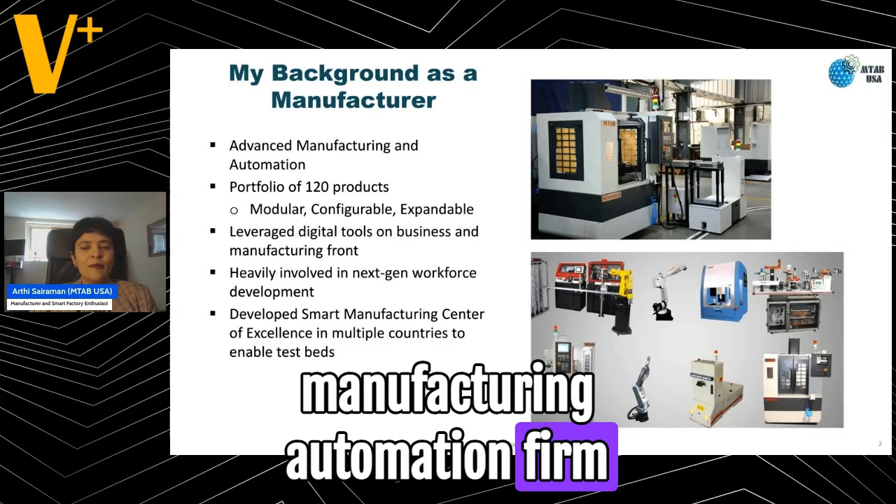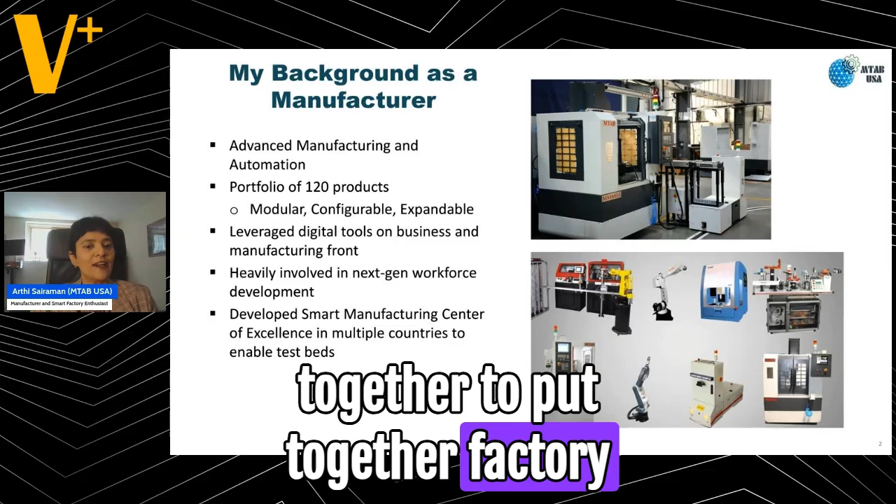In my next slide, I want to share with you what my background is. I identify myself as a manufacturer first, and over the last 15 plus years, I led an advanced manufacturing and automation firm with a strong portfolio of about 120 products, which included CNC, robots, AGVs, and modular automation systems that we could build together to put together factory automation, connect them digitally, and serve our customers with the right results. Now, one of the things that I learned as a manufacturer was to make sure our products were always modular, configurable, and expandable.

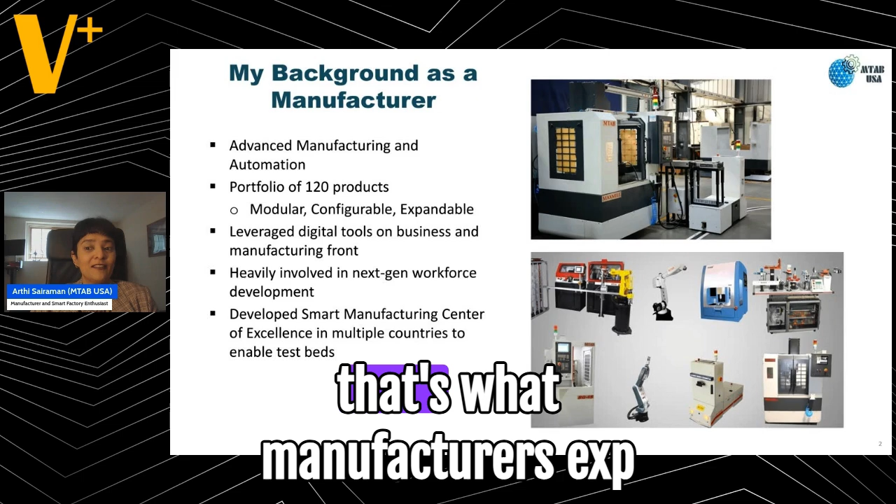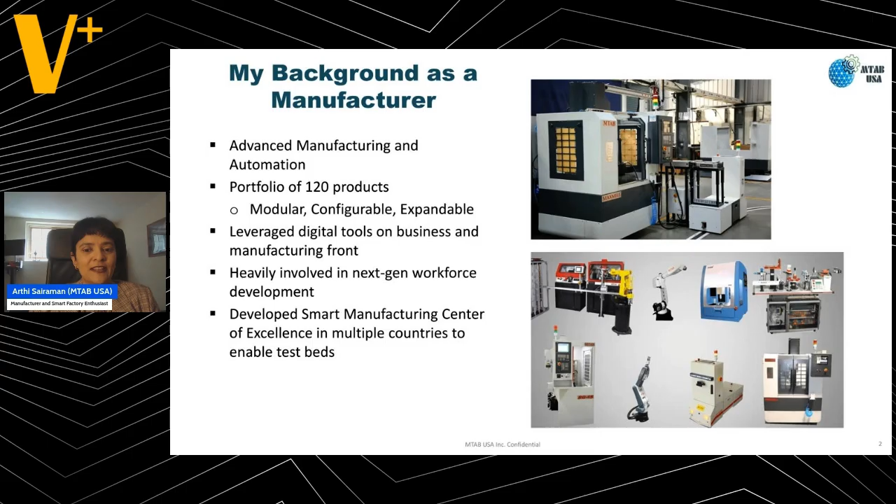The reason is that's what manufacturers are expecting as they are investing in this kind of capital equipment. Quite early in my work at this company, we started leveraging Industry 4.0 and smart manufacturing technologies, and we put them to use in our business as well as manufacturing processes and activities. That resulted in us standing up an Industry 4.0 vertical within our organization.

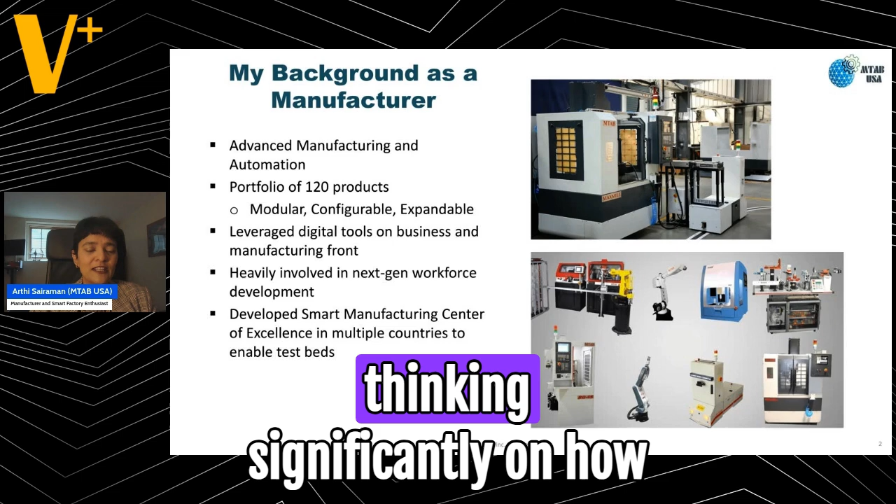And as we started doing that, we started thinking significantly about how this is going to affect the next generation workforce development. We were expecting the people we were hiring, and the people who were already working, to learn new technologies, which resulted in us building a strong relationship with respect to smart manufacturing and smart factory with academia around the world.

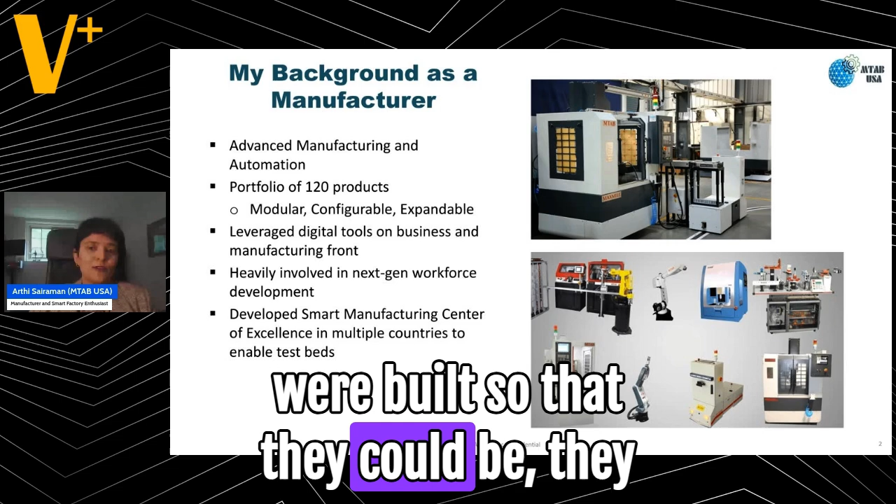We built multiple centers of excellence, about 400 plus across the world. These centers of excellence were built so that they could act as test beds for manufacturers themselves.

Still pleased to know that many of them come back to us and tell us what got them started in this manufacturing and automation career.

The key reason is that manufacturing career and awareness is still very low, and people choose not to come into manufacturing careers because they have some old-fashioned ideas about what this is.

The second thing which is happening is that we have set a high bar for quality. We are able to get good quality products from our manufacturers, and that means there's a lot of pressure to make sure that even when you're coming up with new products, whether it's automation or even simple gadgets that we use, expectation is very high.

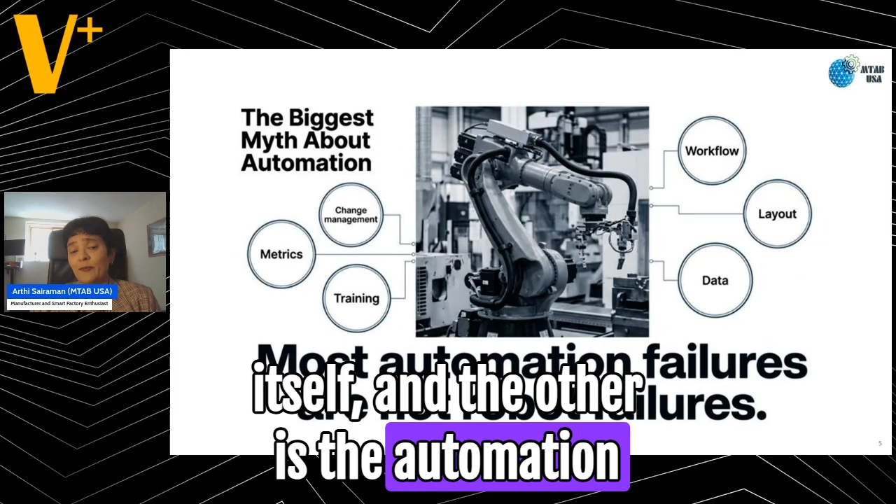Next slide, please. So what's the biggest issue that I have seen in terms of automation? When things do not work, the people who take the blame, one is, of course, the robot itself, the tool itself, and the other is the automation vendor not meeting their expectation. But that is about how the robot needs to be effectively used in the organization. This is also directly related to how the organization thinks about automation itself.

A manufacturer, a machine shop, was facing a significant delay in orders, and the owner of the machine shop had a standard conversation with the supervisor, and the supervisor provided some data, which is reactive data collected from the shop floor, asking why their orders were so backlogged and delayed. The supervisor did have good information, but it was reactive information.

And he said that they were fully loaded on their machines. They were running 2 shifts, and they think that it is a capacity issue. Maybe we should consider adding new equipment or another shift in order to meet their backlog orders. Now, the customer came to us saying, what can we do?

Do we look at adding another machine into their line to meet the capacity issue? Our approach was a little different. We dug a little bit more and asked, do you know what is the actual utilization on your machine? While you collect the information you need to raise money for a new machine, let's measure what's happening on the lines, the machines themselves. We found the machines were running at less than 50% utilization. With that data, they were able to make decisions around process improvement and gain another 20 to 30% of their capacity.

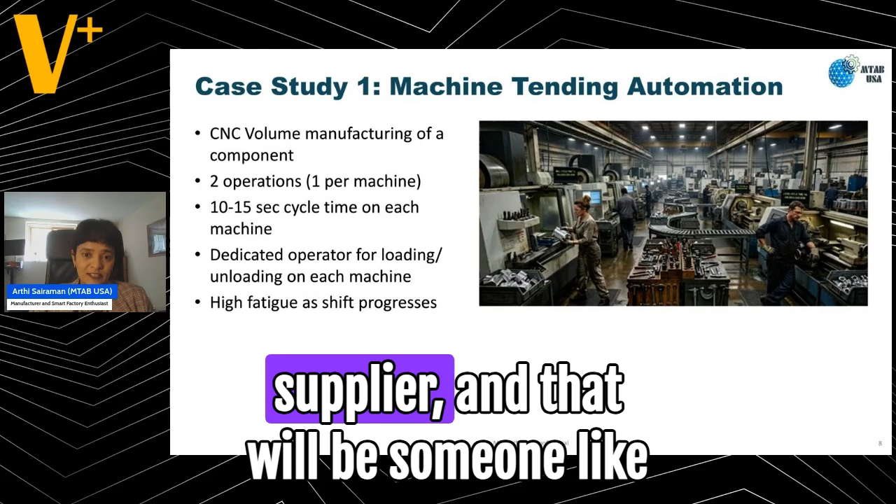Next slide, please. So we will start with two case studies. This is what I had in mind when preparing for this webinar. One is from the perspective of a traditional manufacturer and traditional automation supplier, someone like myself who has done this kind of work for several years. And another from the perspective of a manufacturing startup and how they are leveraging technology to give manufacturers modernization as well as increased capability.

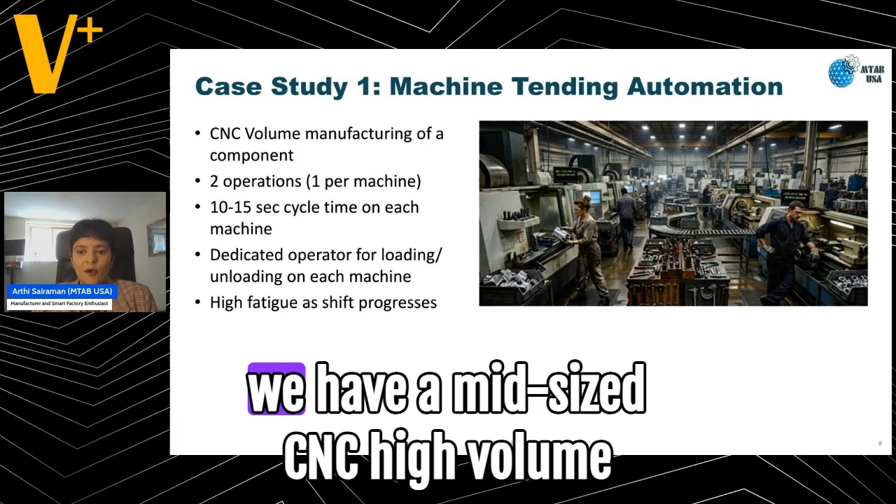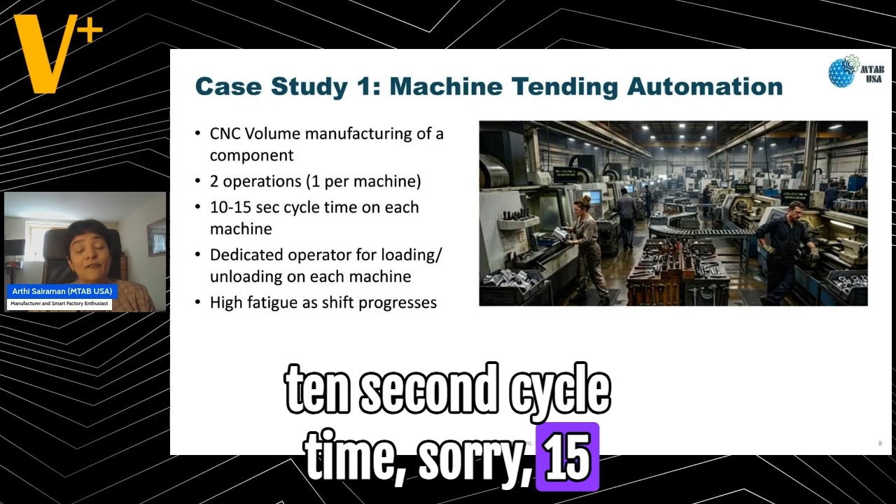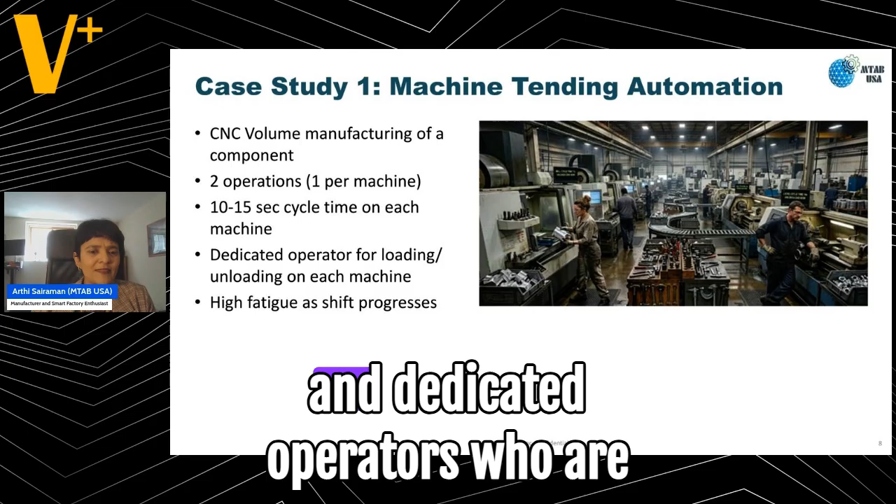So in the first example, we have a mid-sized CNC high-volume manufacturer of automotive components. To protect the privacy of our customer, these images are generated, but fairly true to what we're talking about. The automotive component they're looking to manufacture typically has two operations. The first operation is on a CNC mill with about a 15-second cycle time, and the second is on the lathe with about a 10 to 12-second cycle time. The way they've laid out the floor, we're talking about these long assembly floors, machine after machine after machine, and dedicated operators loading and unloading the machines.

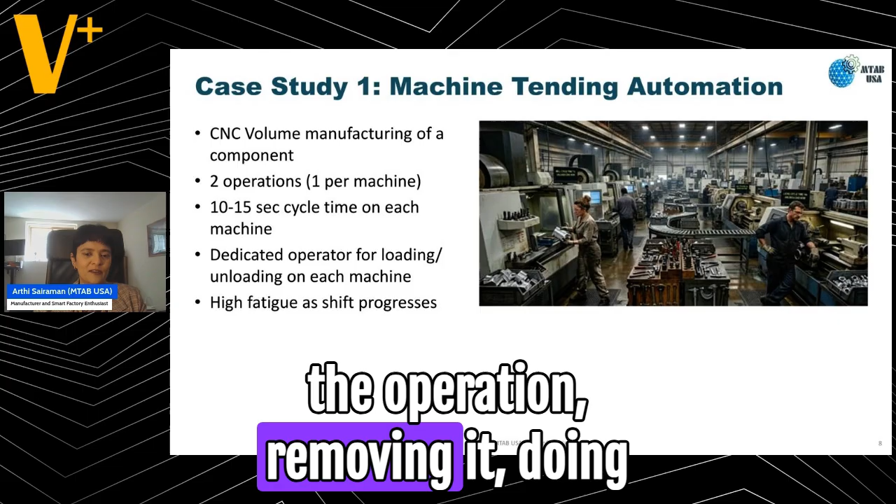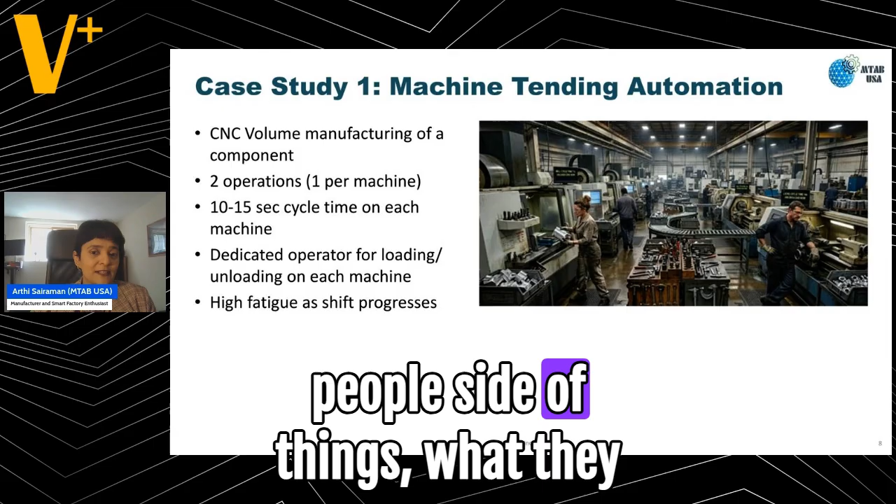With operations that are only a few seconds, you can imagine how quickly they are doing this activity of loading the workpiece, doing the operation, removing it, doing the next one, transferring it to the next station, etc. This can get pretty boring, and it's also high fatigue because of the repetitive operations. This particular unit was running it for two shifts, so they were seeing high variability in productivity. More importantly, on the people side of things, they were seeing high absenteeism as well as turnovers.

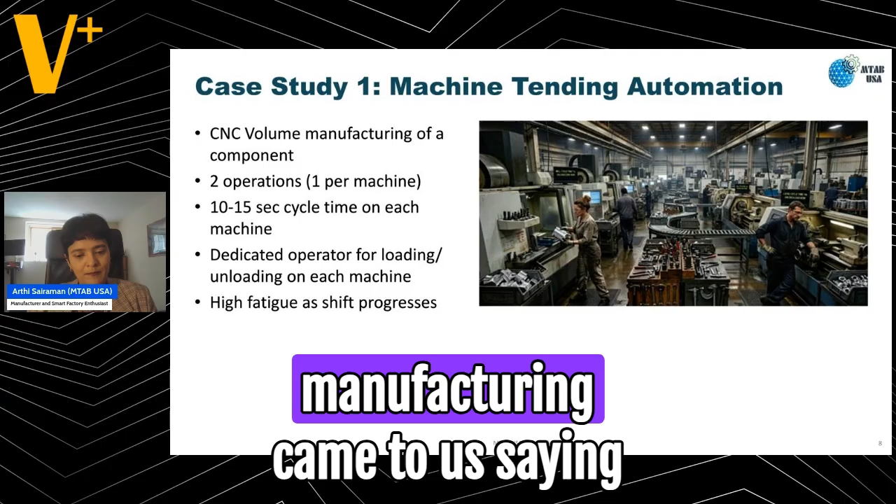When we talk to the supervisors, this is where the 'what else' question happens. The plant manager, the head of manufacturing, came to us saying, hey, we're having this problem where we're seeing high variability in our production. Can you help us solve this with automation? Absolutely interesting project. We are CNC machine tool builders as well as robot builders, so why not? Let's look at it.

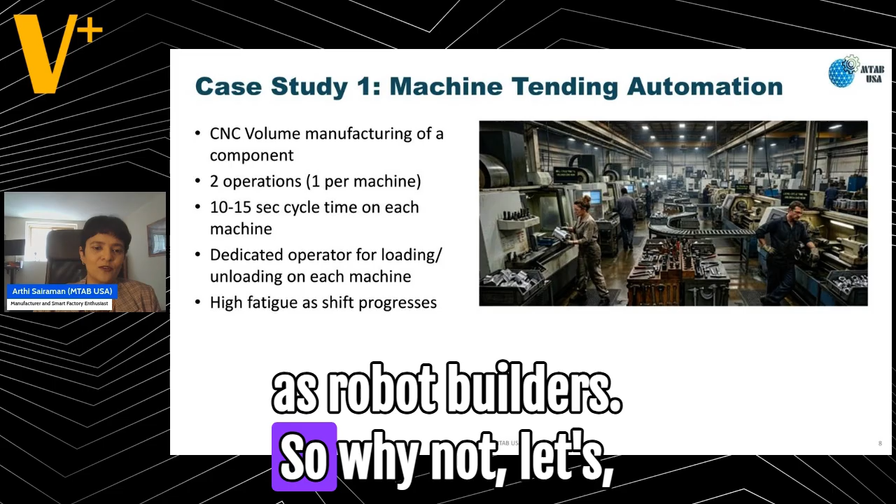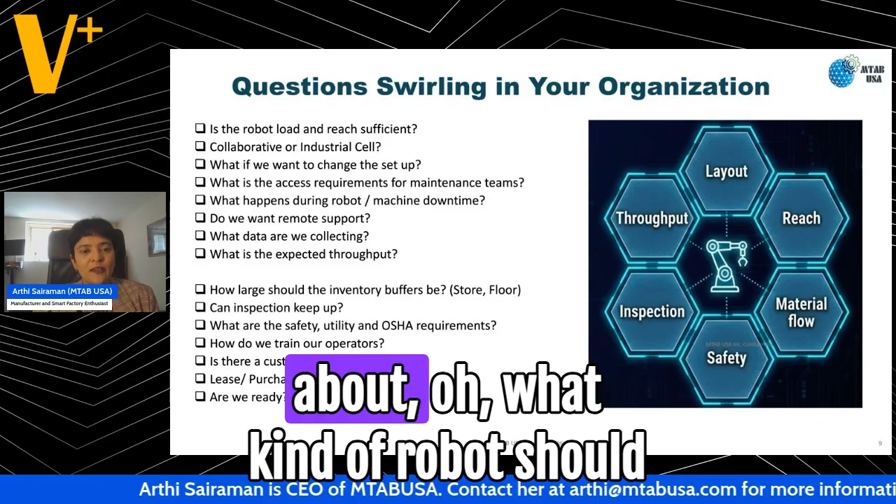So the project is pretty simple, right? They're saying we want to automate. We want you to think about how do you automate. If you go into an organization like this, they already have multiple questions swirling within it. There are the manufacturing and plant engineers thinking, what kind of robot should we buy? What should be the payload, the reach that we need? Should they be thinking about collaborative robots as well? Then, we need the flexibility to change the setup because we might want to change parts that we run through the machine. So how do we go about it? These are the technical questions happening.

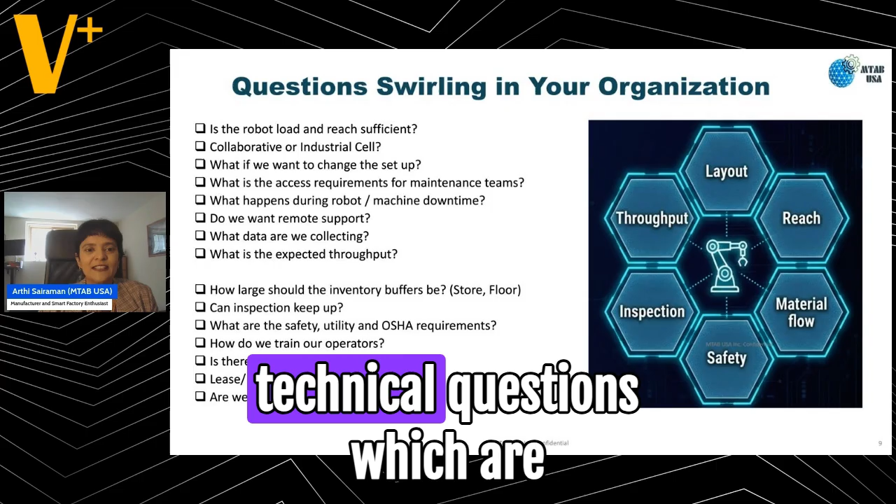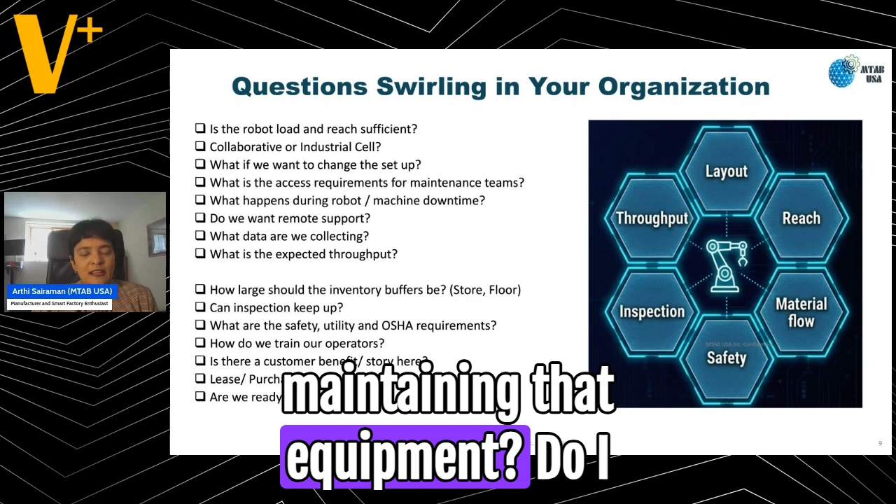And then we have the maintenance and repair team, the engineering team managing the machines, saying, oh, we're going to get some new equipment. How do I think about maintaining it? Do I need new skill sets? What are my requirements? I hear about remote management of these machines—should we think about getting that? Will that help us give better uptime to our internal customers, the plant operators and shop floor folks? Then they're talking about why we're doing this.

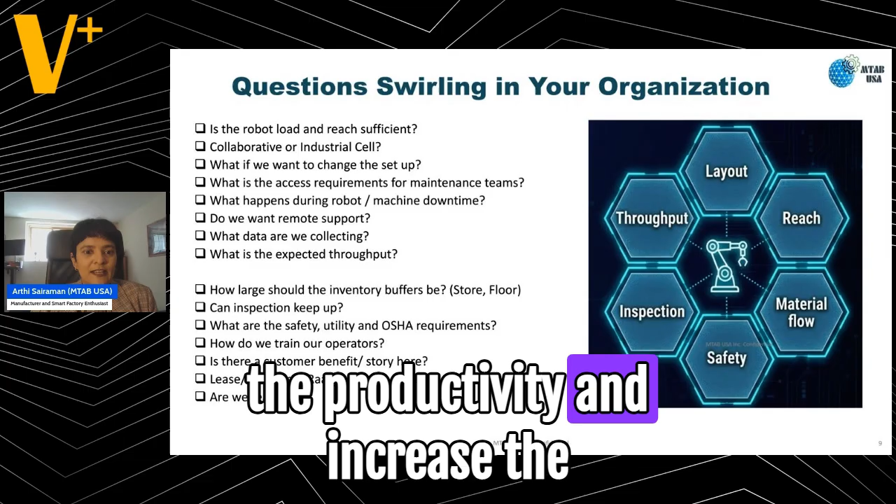How do we stabilize the productivity and increase the throughput within the organization? There are questions around what kind of material buffers do we need. Can my quality inspection keep up with it? Then we have the HR team, which is saying, we're introducing something new—do we have safety requirements that we need to meet, OSHA reporting requirements?

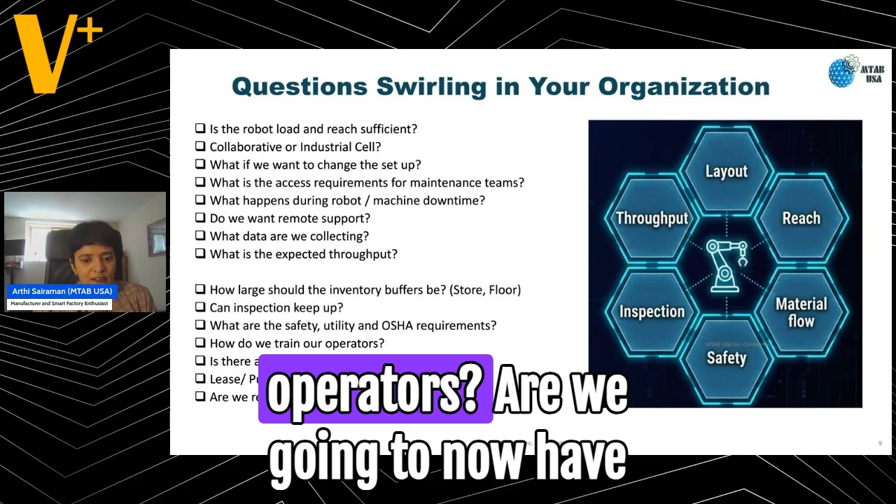Or we have operators—how do we think about training them? Are we going to now have more operators? How do we deploy them? If you're able to free up time, how do you deploy these people? And then, of course, your CXO office is thinking, are we ready for this? Change management, layout, etc. So these are all considerations in there.

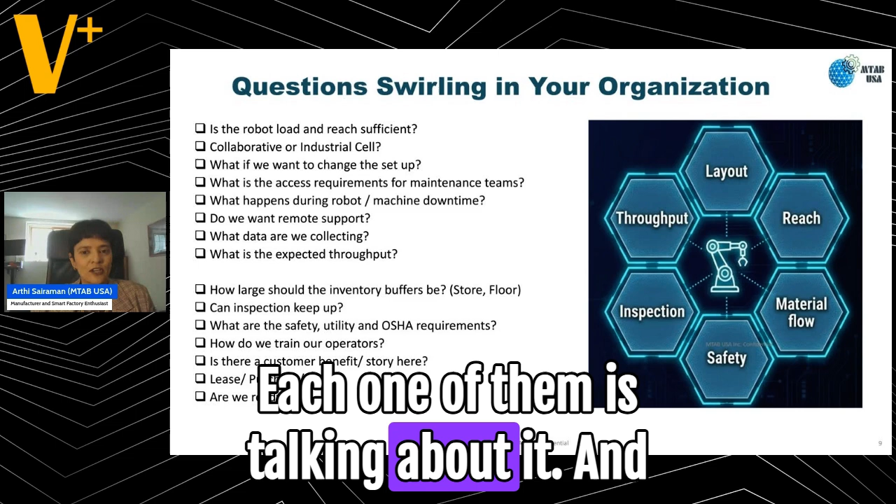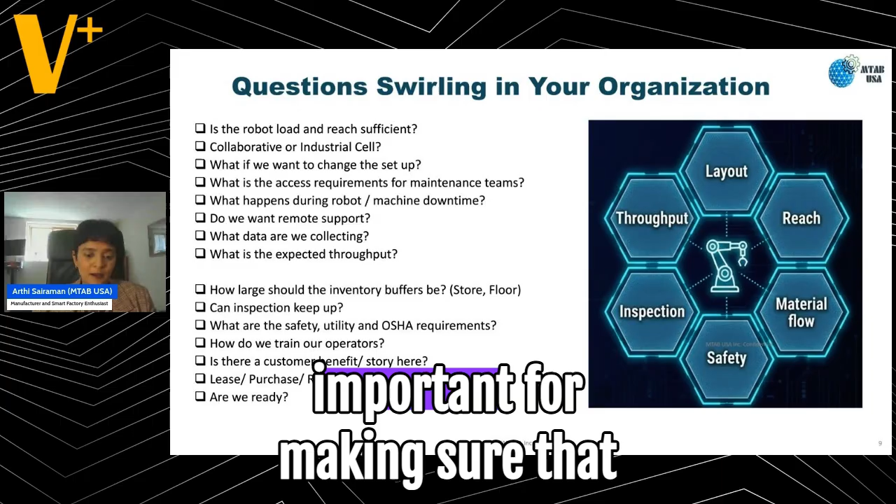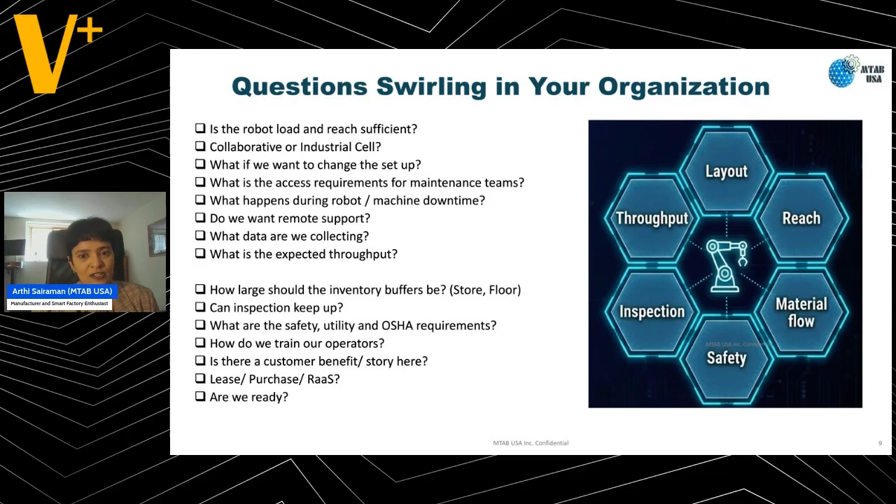If you look at most organizations, these questions are swirling in pockets—each one talking about it separately. Typically, when we're sitting across the table for an automation discussion, not all stakeholders are at the table. This is where we find that a conversation with multiple stakeholders, understanding their requirements, is superbly important for making sure automation is successful and adopted by everyone in the organization. There are many times we've had issues when we didn't have, say, the maintenance team in the conversation, and they come back and poke at the delivered solution in so many ways that it becomes extremely tedious for the automation vendor and for the champions of these projects.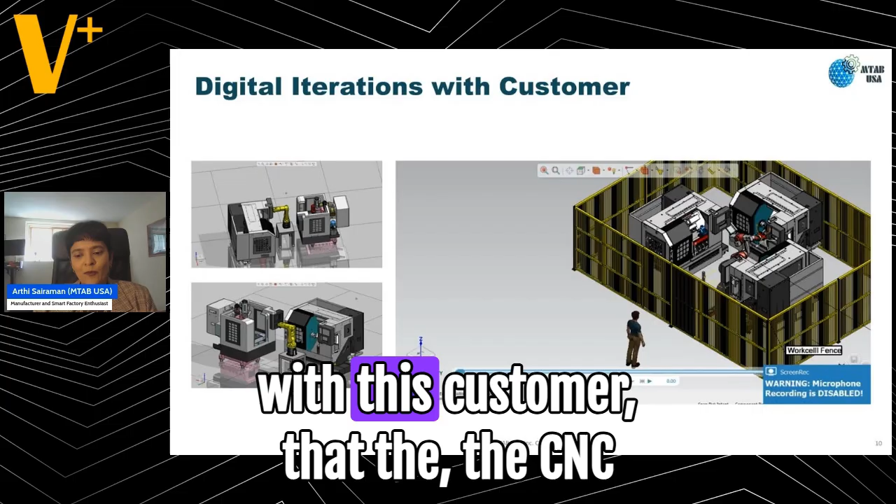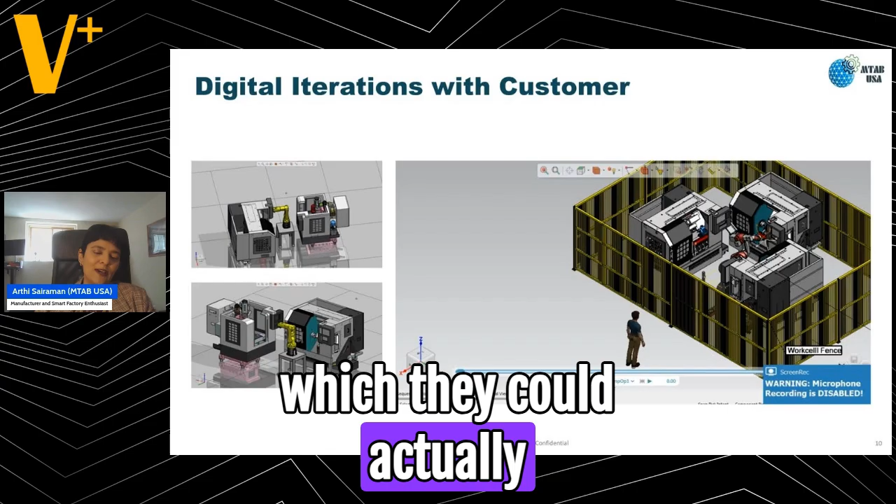In this slide, I wanted to show you that with this customer, the CNC machine shop, we started doing digital iterations. I mentioned early on that we started adopting a lot of digital tools to make it helpful for us to deploy products at our customers. The digital iteration allowed us to show them the different ways they could position their machines to take advantage of higher productivity. So a few different iterations.

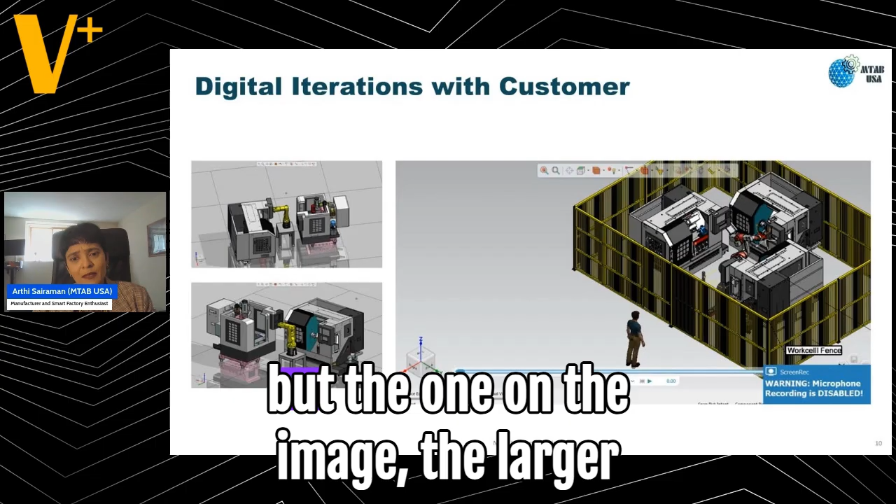The last one is a video, but I'm not sure if you'll be able to play it. The one on the larger image on the right is actually a video clip showing how this particular cell was finally designed and accepted. It is set up behind safety fences.

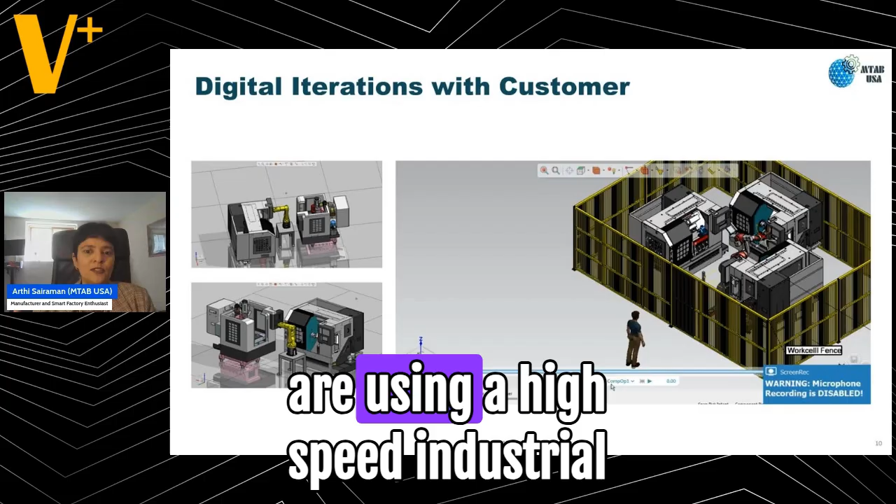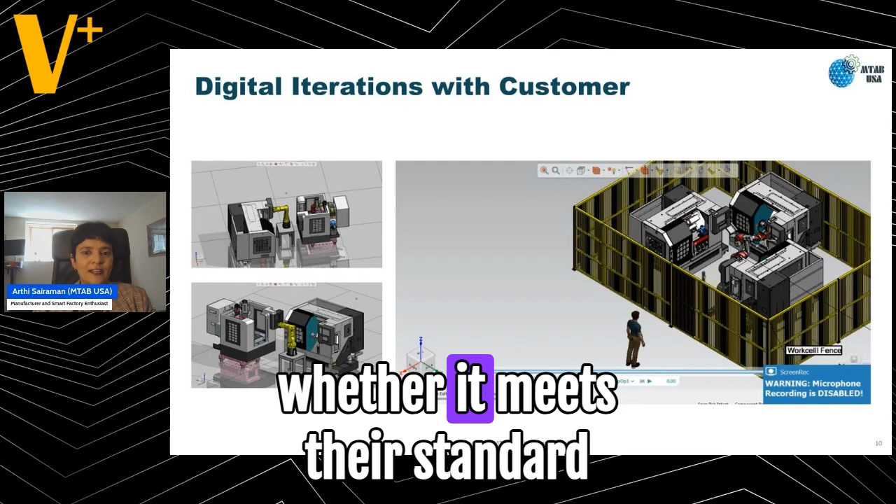We are using a high-speed industrial robot. As we did the exercise of understanding how the machine layout changes and how to meet the productivity requirement, we learned that we would need about 2 lathes to process for 1 milling machine. This particular layout helped the different stakeholders, whether on the shop floor or management, understand what their system would look like and whether it meets their standard operating procedure requirements with respect to operations, safety, maintenance, etc.

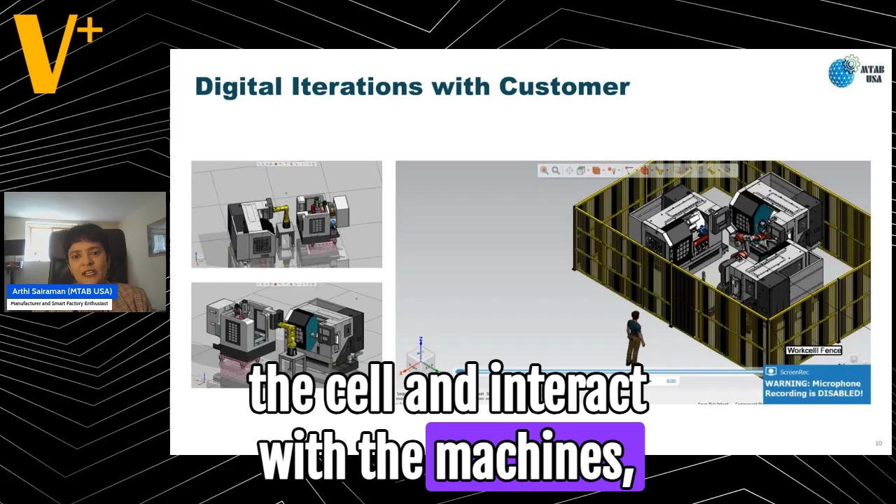When the video plays, you can actually see this person walk into the cell and interact with the machines, know how to go about the cell in order to do any maintenance requirements, etc. So let me just pick from an operator perspective.

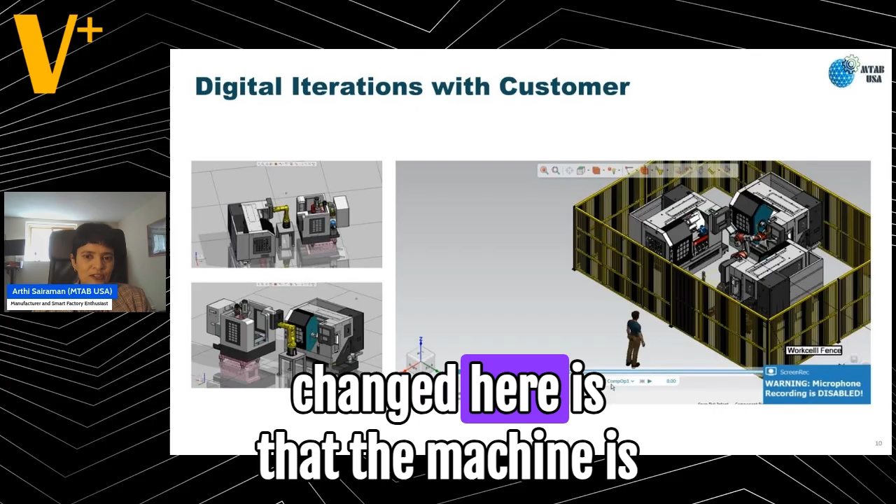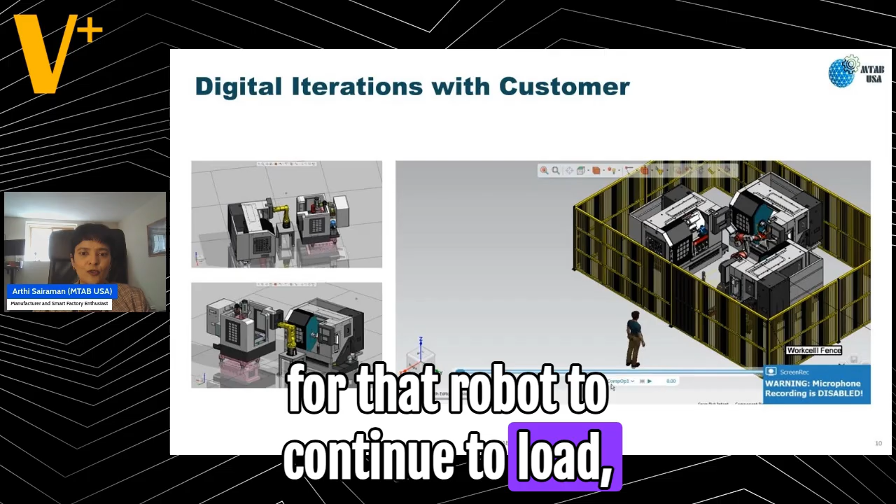The role which has changed here is that the machine is going to be pretty much running everything automated. The operator's role now changes to making sure they safely enter the cell and ensure that material is available for that robot to continue to load, unload the machines and operate, and then remove the finished goods and take it into the quality system. The operator needs to be trained on how to safely enter, how to restart the robot once the pallet is exchanged, and in situations, maybe go in there and change out the tools because tools wear out and they would need to do that as well.

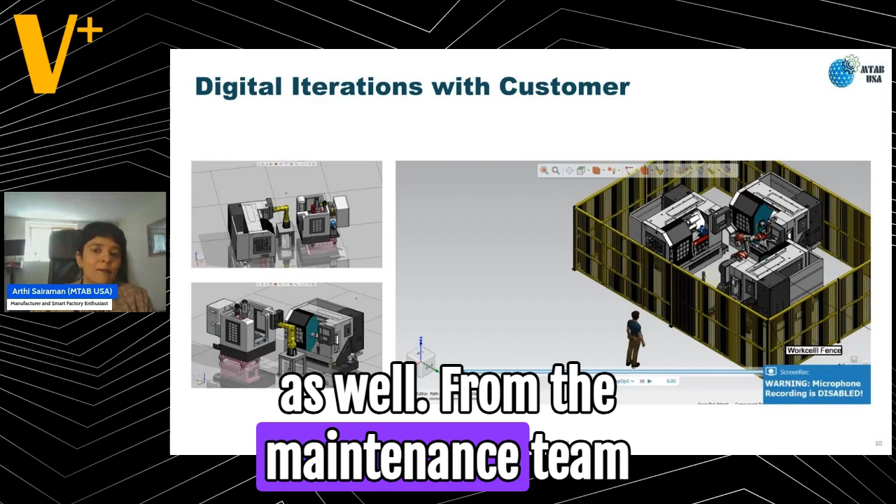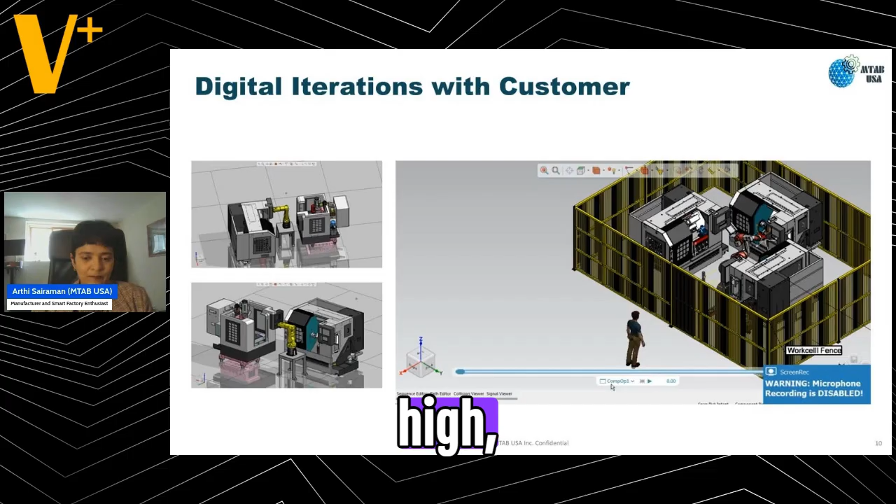From the maintenance team perspective, they all know how to maintain the CNC machines, but now they need to understand how to maintain a robot as well as calibrate the robot. One of the frequent wear out parts that you would see in these kind of high volume operations is that the grippers tend to wear out. They would need to know how to switch out the grippers, do the recalibration so that this cell functions correctly.

In this particular exercise, we also learned that today's process looked at material crossing paths, and that creates safety issues. Apologies. So what we also learned was that material was basically crossing paths, which can also result in safety concerns as well as potential material damage. So we were also able to look at what should be the flow of material across the cell, across the shop floor, and these gave opportunities to our manufacturer to make improvements in the process.

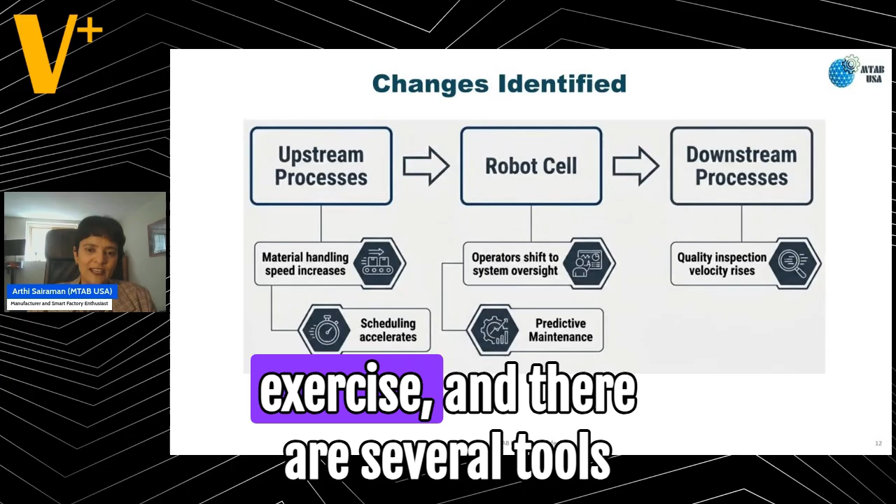Next slide, please. So doing this simulation exercise, and there are several tools which are available to do this kind of simulation, and some of them may actually be available within your existing engineering portfolio of software as well. What we observed was that there were changes that needed to be done in the entire process as well, and these are simple changes, right?

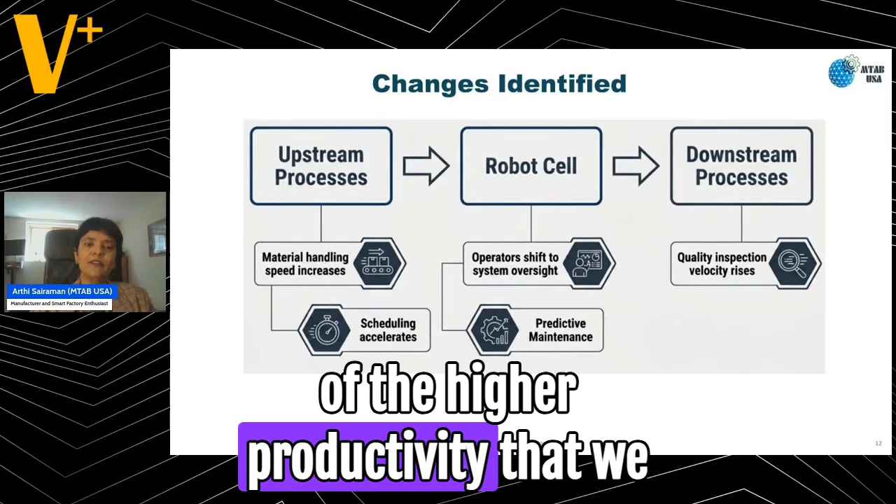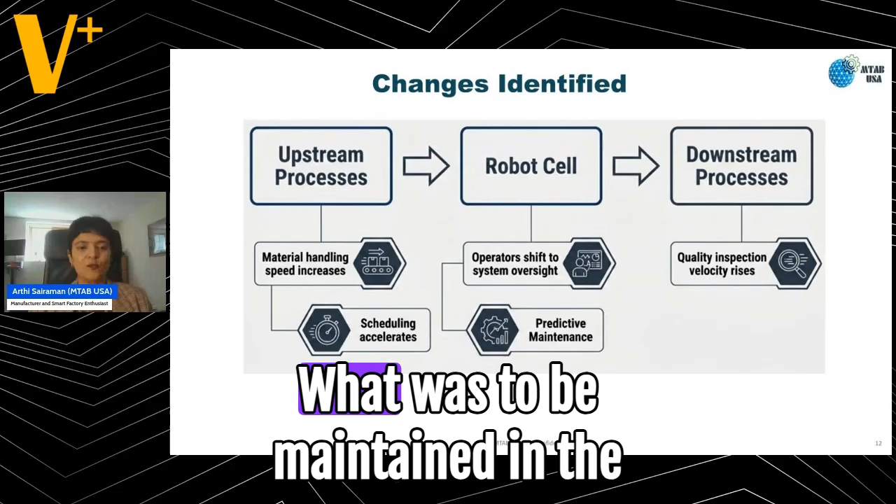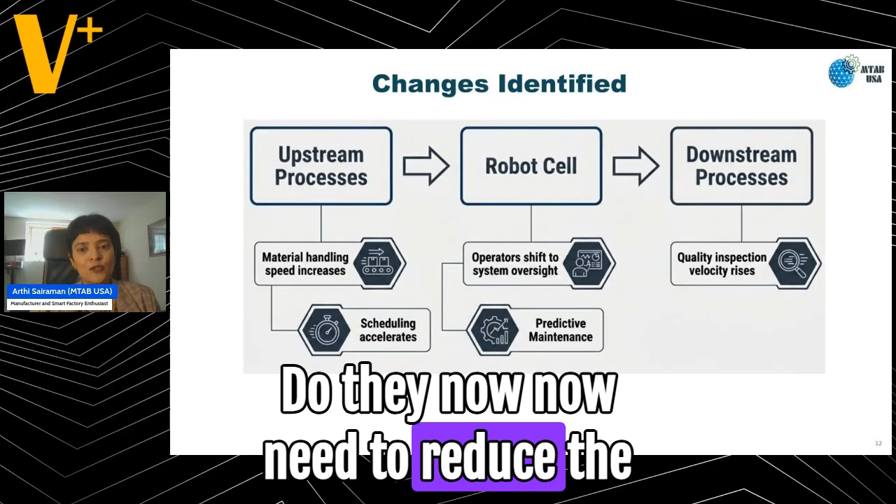In the upstream processes, because of the higher productivity that we were delivering this cell, we needed to make sure that material was sufficiently available in the stores and was able to be delivered to the robot cell on time. So what was to be maintained in the shop floor. Then from a downstream perspective, once the finished product comes out of the cell, how is the quality team prepared to take in that higher throughput? Do they now need to reduce the sampling exercise or adopt a few different techniques in order to make sure that if they are critical components, they have the necessary specs captured before they are going into the customer flow.

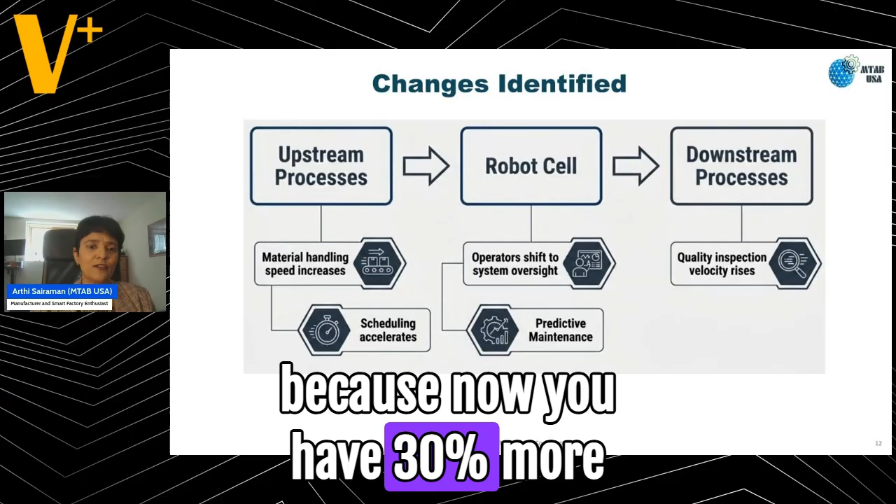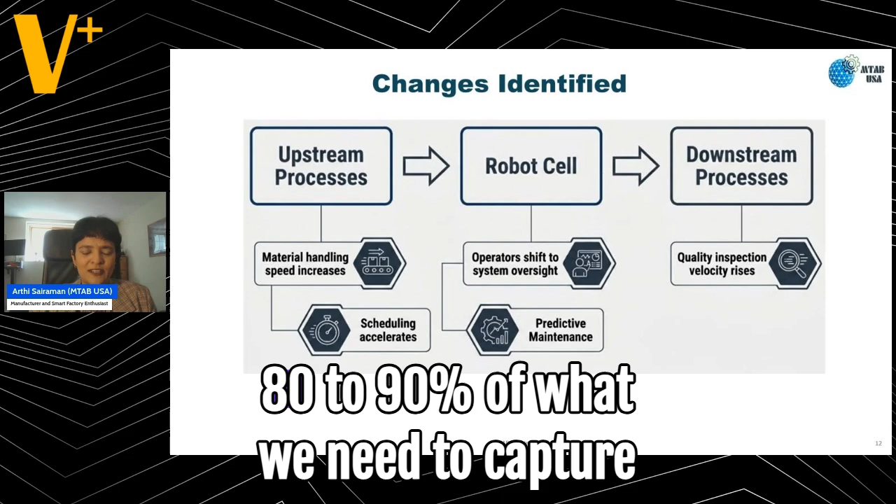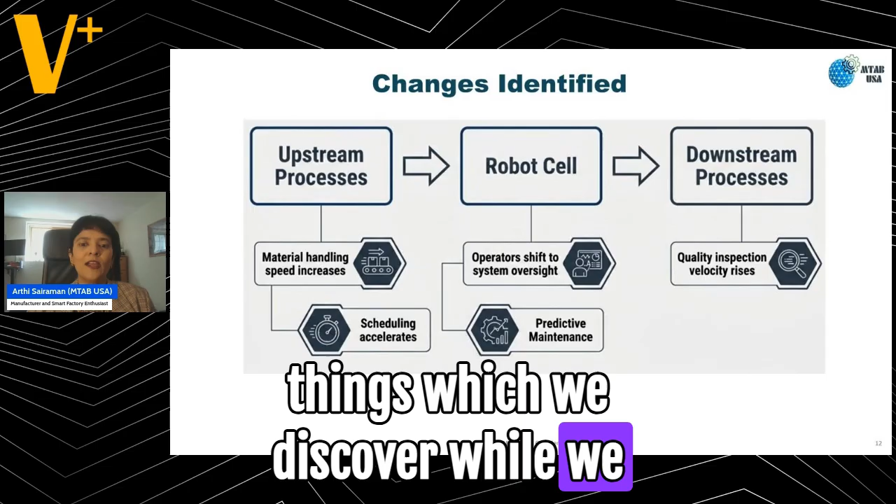This also changes the procurement because now you have 30% more throughput. So you need to make sure that you are able to talk to your suppliers on how material delivery gets scheduled as well. Now, typically, when we do this kind of digital twin or simulation exercise, about 80 to 90% of what we need to capture from the automation perspective, we are able to do that in a digital manner. But about 10 to 20% still ends up being things which we discover while we are building the automation solution, while we are deploying it at the customer site as well.

So these are conversations that they were able to prepare for during this planning exercise instead of trying to address it post-deployment, from the maintenance perspective. I mentioned earlier that sometimes it is the maintenance which could potentially cause an automation project to fail because they have not been consulted or trained on how exactly this system is going to be maintained. They understand what spares they need to carry and what the expectation of them is going to be for ensuring high uptime on these robotic cells. This is absolutely needed in order for automation to be successful.

Quality team with higher throughput, they need to reconfigure their process to be able to take in and ensure that you're looking at the throughput from the start to getting it in the customer's hands. The plant manager and executives also start having higher visibility into what is happening on the shop floor, how they can redeploy, how they could potentially handle a rush order for a similar type of component. Now, this particular implementation, there was a lot of data available, and I'll be honest that not all of the data available was being used, but there is potential for them to do so in the future.

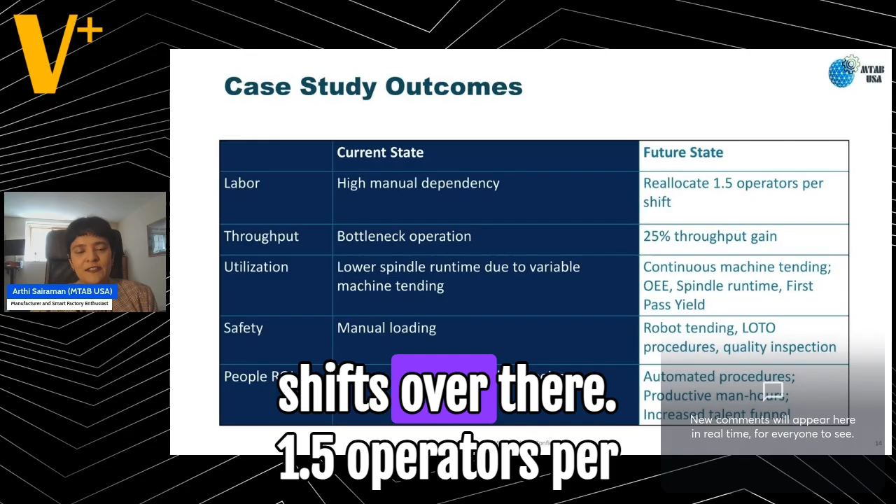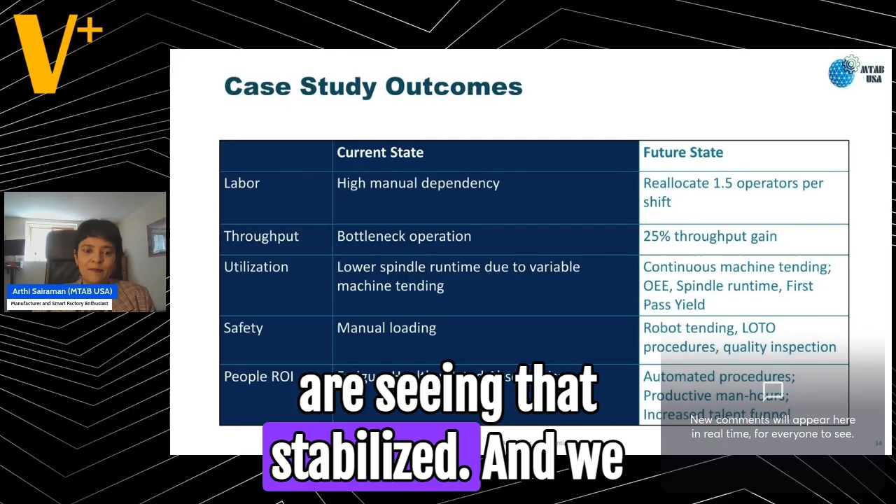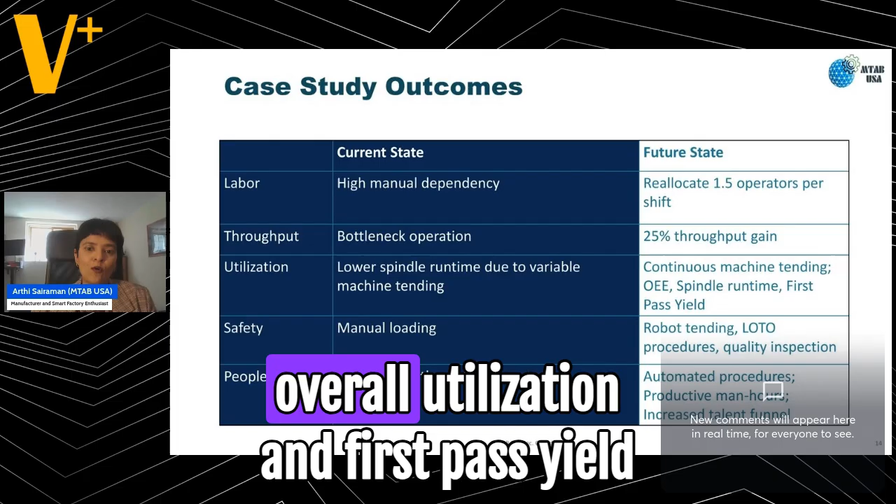So what was the outcome of this particular deployment? There were about four operators working across two shifts. 1.5 operators per shift were freed up so they could do something else of more value. The throughput variability we were seeing stabilized, and we also started seeing increased gain through the entire value chain because we were using a continuous tending that was not experiencing fatigue. We also saw that the overall equipment efficiency, the spindle runtime, overall utilization, and first pass yield increased from that setup.

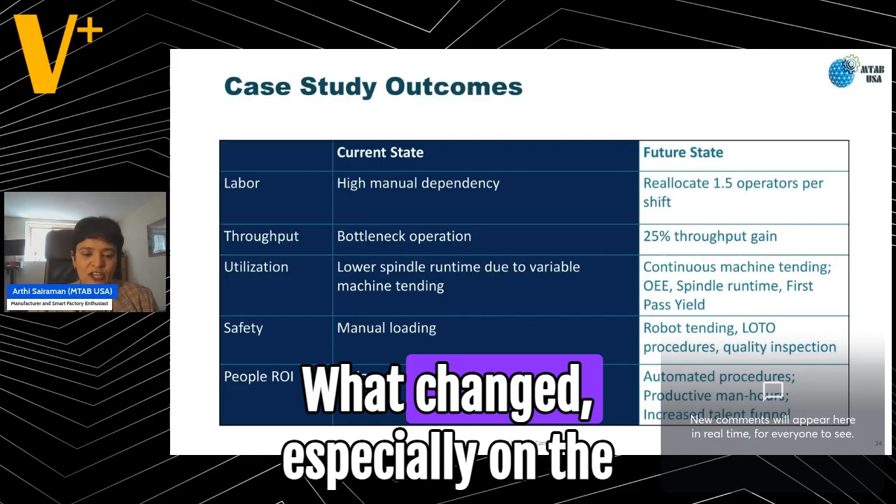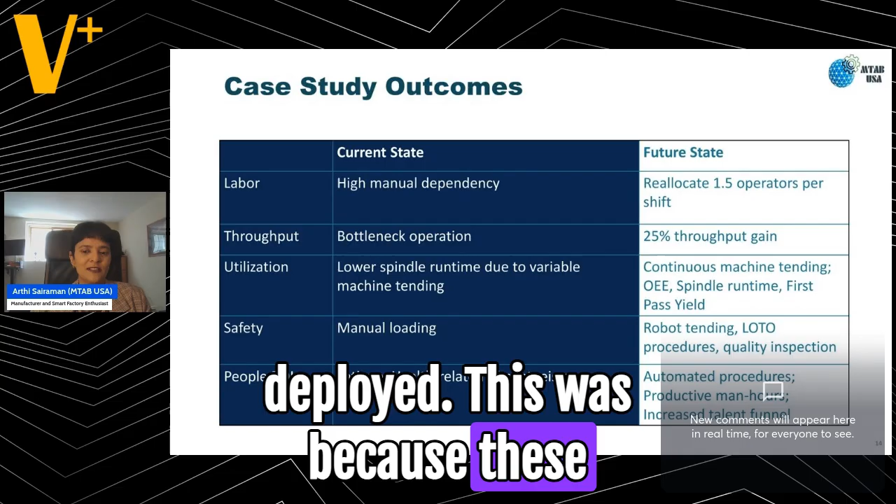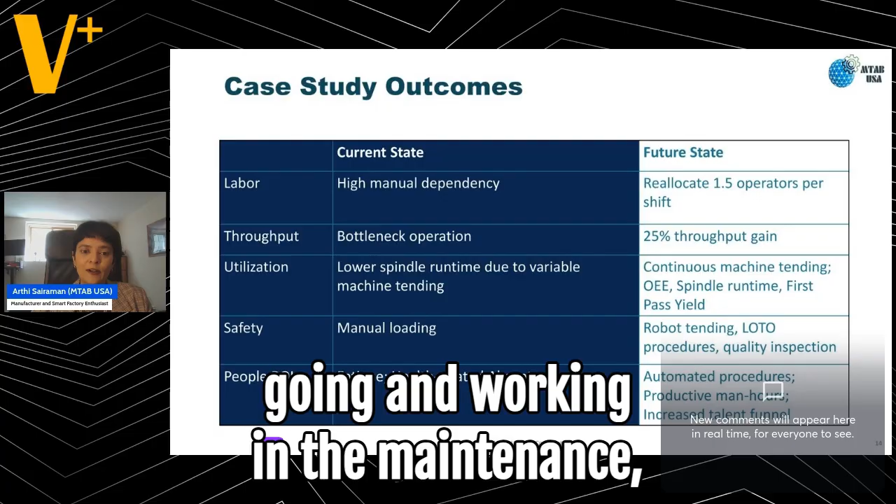Safety is important as well. We were having fatigue and absenteeism, and I'm going to connect the safety and the people ROI together. We started seeing lower amounts of those with the robot automation. What changed, especially on the people ROI front, was a decrease in people leaving the organization in the cell that was deployed. This was because these operators were learning something new. They could see a more interesting career path, towards programming the robots, managing changeover setups, going and working in maintenance, picking up skills in quality because during the additional time they were also trained on the quality side of things. So this was the outcome from one of the case studies.

Moving to the next one. This is a case study I wanted to talk about from a new age manufacturing startup perspective. There are several companies actually using good use cases and experiences they've had with manufacturing to come up with solutions to solve for legacy manufacturing and modernize them. One such company that I had the pleasure of working with is R2 Labs. They are based out of Atlanta, and they are a phenomenal team which has manufacturing experience and has understood how to use the concept of artificial intelligence, machine learning, computer vision, and controls, and make it a solution that can fit into legacy manufacturing. They have a principle they work with, which is no rip and replace, meaning work with what the manufacturer has and make them better by augmenting their technology, their solution with R2 Labs products.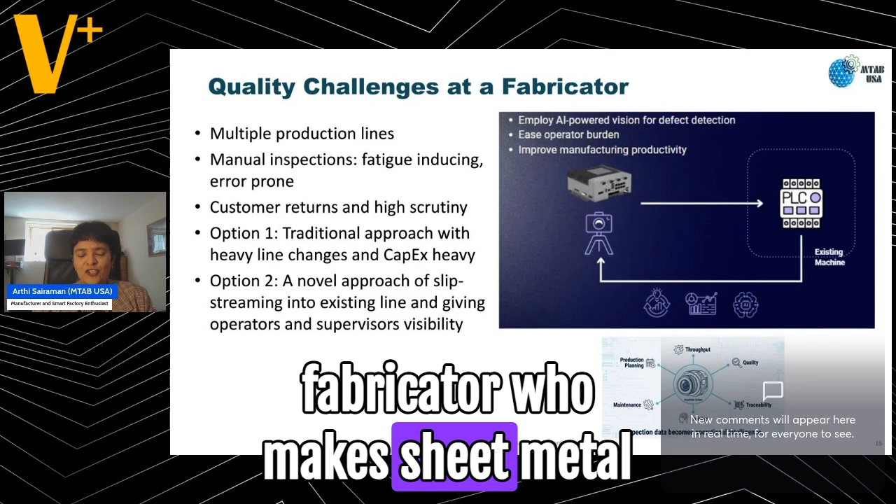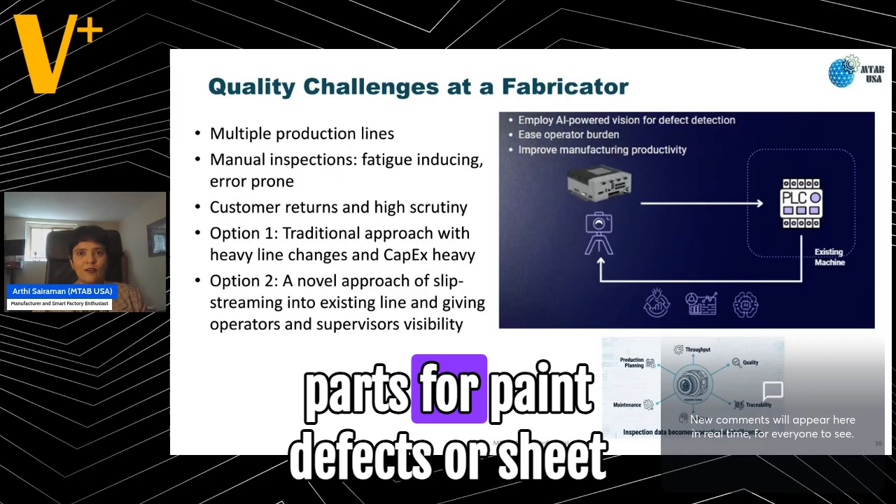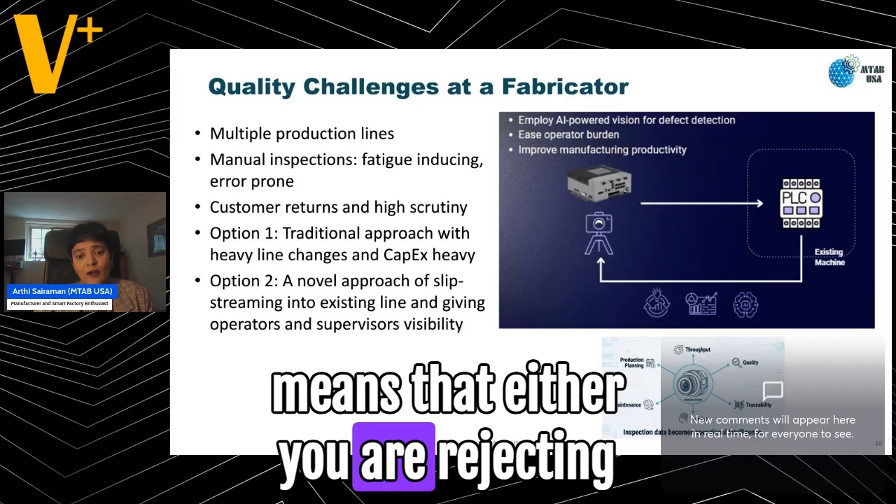So in this case study, we're talking about a fabricator who makes sheet metal parts, and they have multiple production lines. The issue is that they're doing manual inspection of their sheet metal parts. If you are watching these parts for paint defects or sheet metal defects, you find that after the first hour it starts becoming extremely tiresome and errors happen. And when errors happen, that means either you are rejecting too many parts or a bad quality part slips to the customer, and then you have to deal with customer returns and increased scrutiny to make sure this doesn't happen, and it keeps adding up in terms of workload as well as cost to the company.

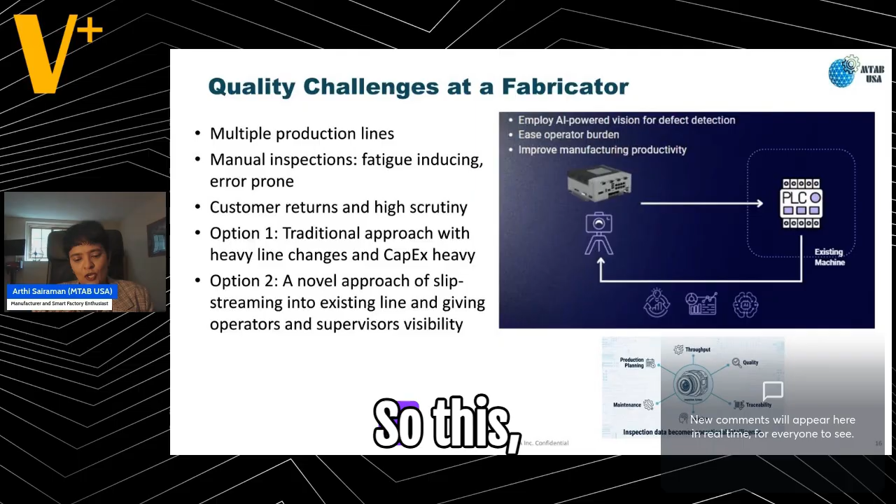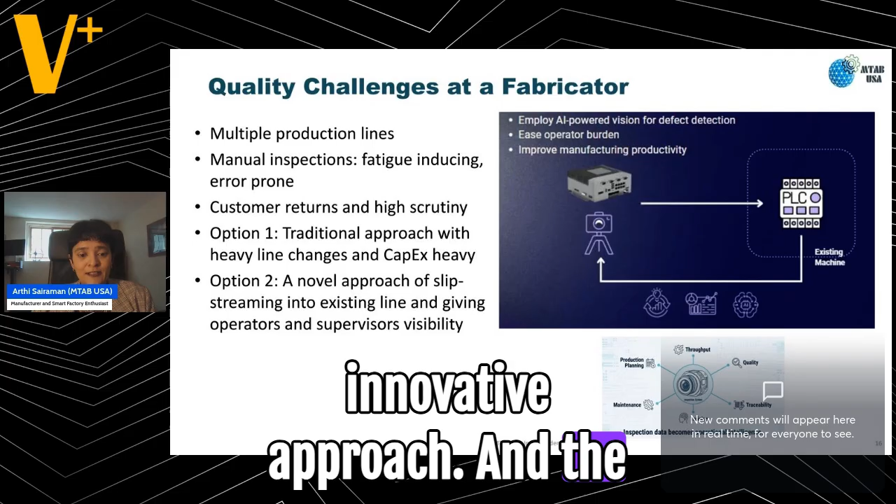So this fabricator was looking at two options. One was to go to a traditional automation vendor and come up with a solution that required significant line changes and heavy capital expenses. And some of the folks here wanted to take a more innovative approach. The novel approach they decided on was taking into consideration what R2 Labs builds and slipstreaming it into the existing line, giving the operators and business supervisors visibility into these quality issues.

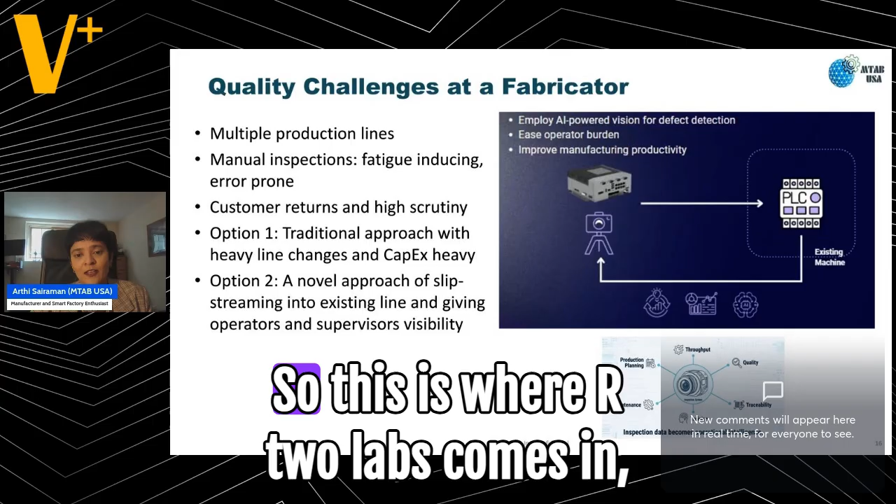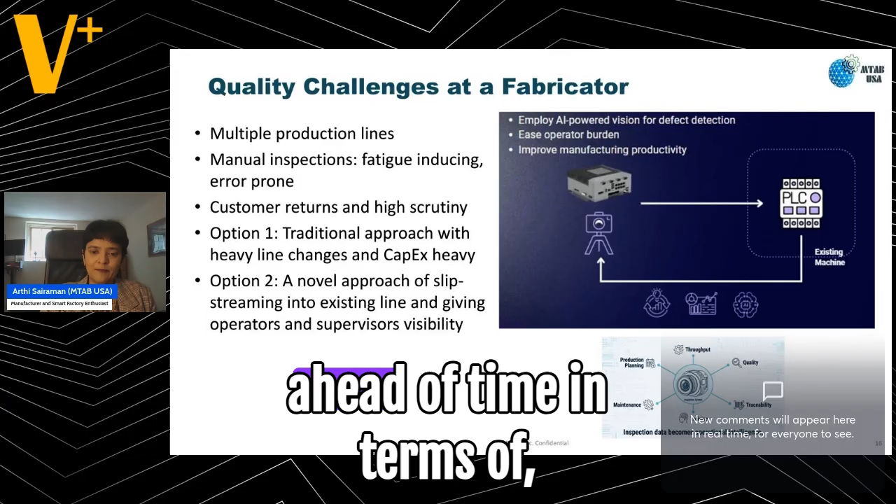So this is where R2 Labs comes in, and I definitely will make sure that we'll talk about the product that they have put in over there. Their solution was simple: minimum interruption to the product line. A lot of stuff was done ahead of time in the simulators to be able to result in the solution itself.

So what R2 Lab has is something called RAC, R2 Autonomy Control. This is a control tower capable of connecting with any type of equipment, age no bar, brand no bar. It could be any control system, a CNC control, PLC, PID, microcontroller, whatever it is. It's able to talk to these different kinds of systems, unify them, gather information, and use that information to give visibility to the people who need it.

So from an integration perspective, their solution allows you to quickly integrate multiple types of assets available on your shop floor and make use of the new technologies available to them. In their case, what they deployed was a computer vision system for quality inspection in as short a time frame as possible. Their system actually allowed you to do certain things in parallel instead of sequentially.

They were able to gather data images of what a quality defect would look like, train their system algorithms using artificial intelligence and machine learning to build algorithmically how to spot defects, run it through a simulator, train it sufficiently, and then bring it and deploy it at the shop floor.

As I mentioned, 80% of the training is done away from the shop floor. But the balance 20%, the little bit of fine tuning which always happens in automation, was done on the shop floor and got deployed. What they got out of it, and this project is still ongoing, is 25 to 30% more throughput for the customer, 20% reduction in idle time, and more than 19% reduction in reject rate.

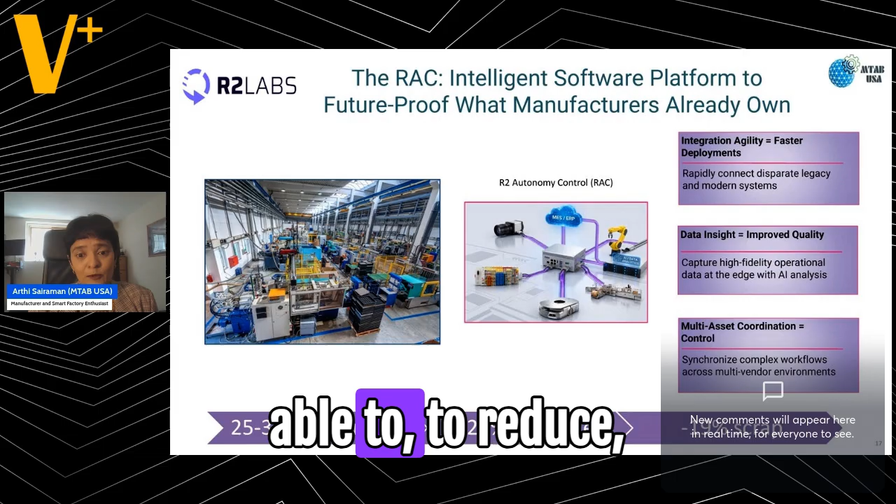So as we come towards wrapping up and summarizing, from a framework or playbook perspective, when you as a manufacturer are considering automation, I would like you to think about it in different phases. The first phase is all about learning about your organization. This being a consultative exercise actually benefits manufacturers significantly. Even if you're a small manufacturer, this has huge benefits because you learn a lot about your organization and what you need to make sure is in place for the automation that you're deploying.

This can be physical or digital automation that is going to be successful for you. That means knowing what your business outcomes are, understanding and mapping your process fully, and then knowing who the different stakeholders are, including the shop floor, IT, workforce, and what is needed by them in order to deploy automation. So that's the first part of it.

The second part is how we learn. Think about how you learn, how your kids learn. You find that we learn by watching things as well. That digital simulation we're talking about is very valuable because it allows you to take what would traditionally be maybe a 30 or 40 page statement of work document and allows you to visualize how that needs to be done.